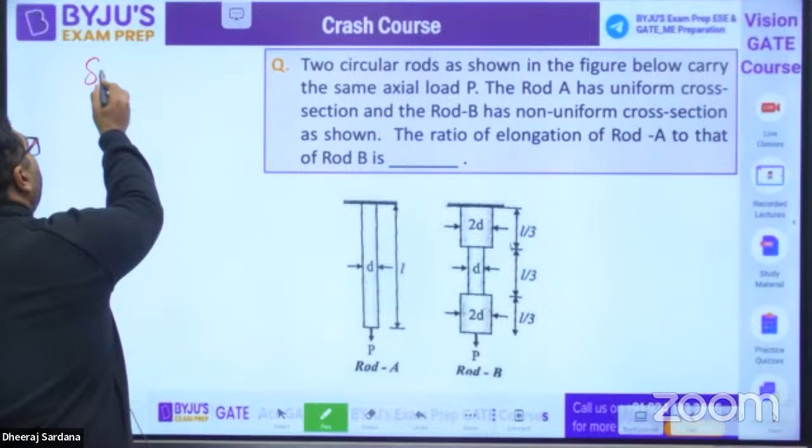So guys, here we need to find out the ratio delta A divided by delta B. That ratio you need to find out. This type of question you will get in numerical answer type, majorly, and you need to answer fill in the blanks with just that number, that ratio. So just try to solve it, I will give you the hint.

You already know that delta is PL by AE. So when writing for rod A, it is very easy. It is going to be PL upon AE, where area is pi by 4 d square. So we can say A is pi by 4 d square. And if diameter becomes 2d, then area becomes 4 times of A, so A dash is 4 times A. We can consider like that.

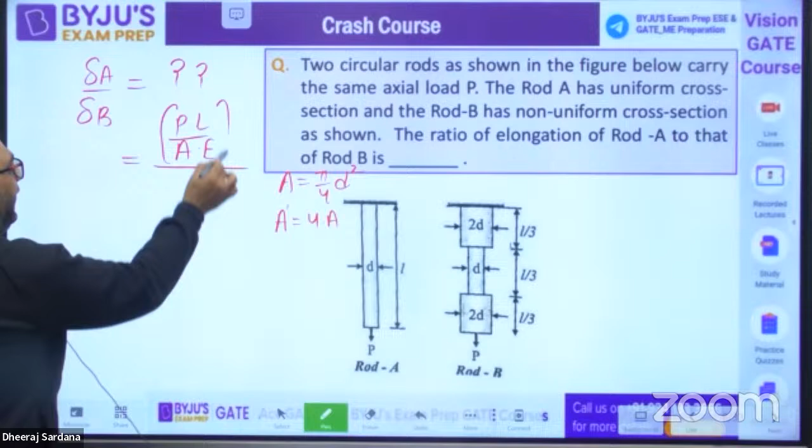Now you know that length is L by 3, L by 3, L by 3 for the second bar. So this is the first part for A. When we talk for B, these are bars in series - consider this bar number 1, bar number 2, bar number 3. As P force is acting, for any bar if you apply method of section, the force will come out equal - force will be P only.

So when we take these sections 1-1, 2-2 and 3-3, you will find in all the sections the load is P. So obviously here P1 equals P2 equals P3 equals P. And you know that in series, deltas are going to be added.

So I can say delta 1 plus delta 2 plus delta 3 for these 3 bars will be equals to P1 L1 upon A1 E1, plus P2 L2 upon A2 E2, plus P3 L3 upon A3 E3.

Now you can see the length is L by 3, L by 3, L by 3, and Young's modulus is same for everyone. So when you put these values, P by E comes out common. And L by 3 is also common, so you would be having 1 by A - this is going to be 1 by 4A plus 1 by A plus 1 by 4A. Just put this value and you will get the answer.

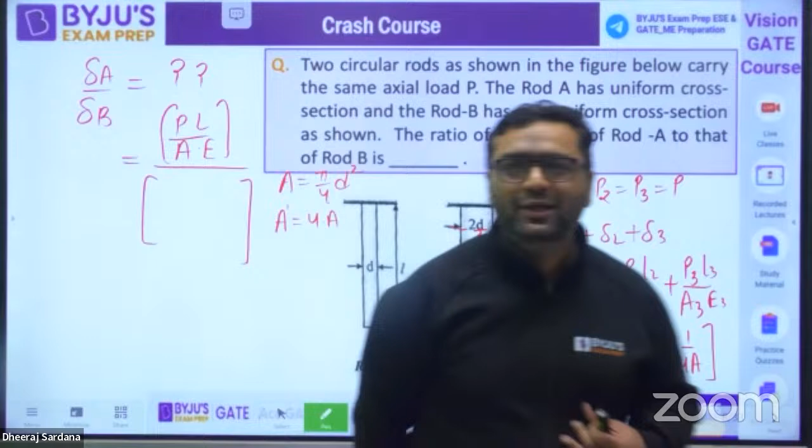Has anybody solved it? Very good, very good. So Darshan has given the answer as 2, Ludwig has given 2, Rohan has given 4 by 6, Papa Ka Ghoda has given 2. I would like to say the answer for this question is coming out to be 2, since I have already solved it. So those who are getting a different answer must have made some mistake in calculation. The answer will be 2. Is it clear? Any doubt for anyone? Because load gets cancelled out when you put this value.

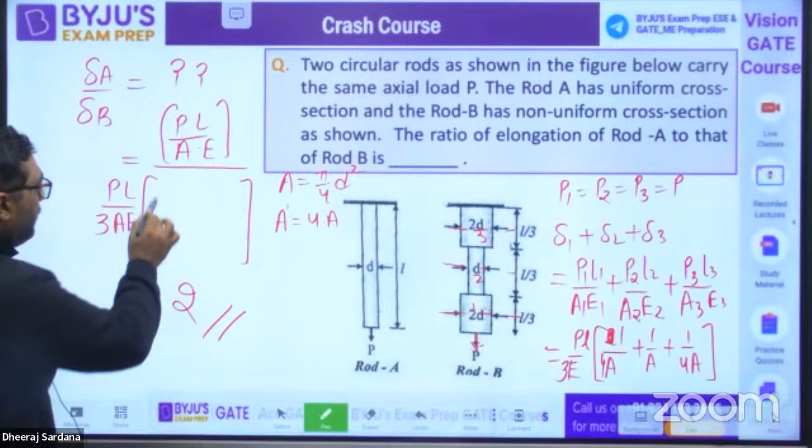You would be having PL upon 3 divided by E there. I can take A also common. Then you would be getting 1 by 4 plus 1 plus 1 by 4.

So when you have this, the rest terms will get cancelled out. The answer will come out to be 2. Is it clear for everyone? So this is how you find the answer to be 2.

Shall we move to the second question? Moving to question number 2, guys, this is from Mohr circle, your favorite area. I hope everybody gives the right answer. If anybody has any doubt, please ask me.

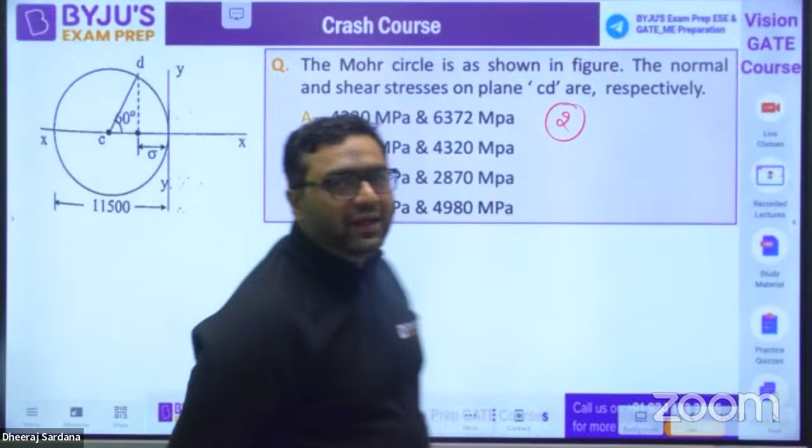So just solve this question, guys. This is for Mohr circle and we need to find out this value sigma. Yes, my dear, it is very easy to solve.

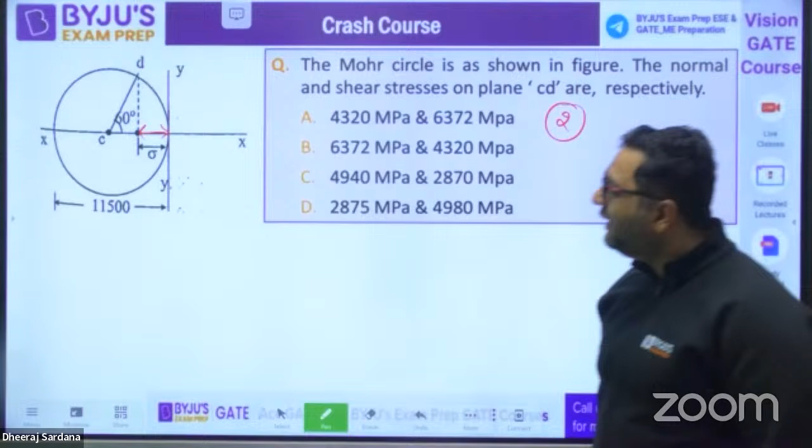Just try this. If this is radius R, can you see, if I want to find out sigma, what do I need to do? I just need to subtract this from radius. So sigma is nothing but radius minus R cos 60. That is what you need to do, and you will get the answer.

They are asking you the normal and shear stresses on plane CD. Once you get sigma, how can you find tau? This is R sin 60, so tau will be R sin 60. And to find radius, they have already given you the diameter.

Can you tell me the answer for this question, guys? Wonderful, wonderful. Arvind, what is the answer? Ludwig is saying D, 2875 and 4980. What about others? Papa Ka Ghoda is also saying D. Very good. Arvind also saying the same. Sumit Parashar also saying the same. Wonderful, guys, बहुत ही शानदार.

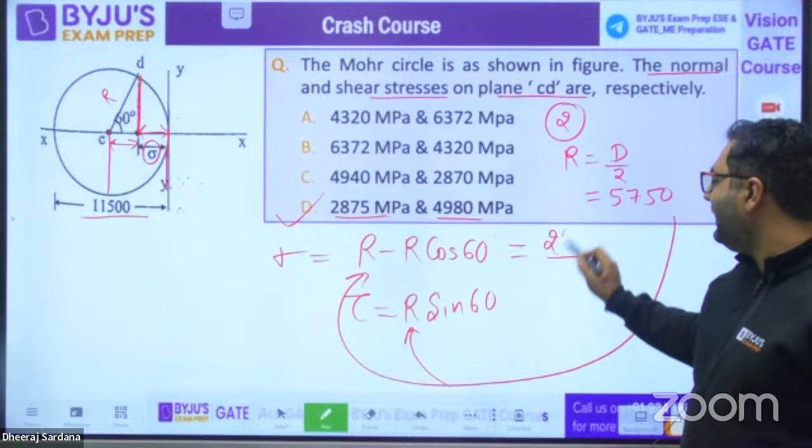And the answer is D, my dear. What is radius? Diameter by 2. So we have the diameter as 11,500, so we would be having 5750 as radius. Just put this value here and here, you would be getting the value of normal and shear stress. You will get 2875 and 4980. Very good, guys, बहुत ही बढ़िया दर्शन, संदीप, बहुत ही शानदार।

Moving to question number 3. In this question, this is from compound beam, where we have beams connected in series, and you need to find out the reaction at the middle support beam. So guys, how to do this type of question? You would be breaking this beam into two parts.

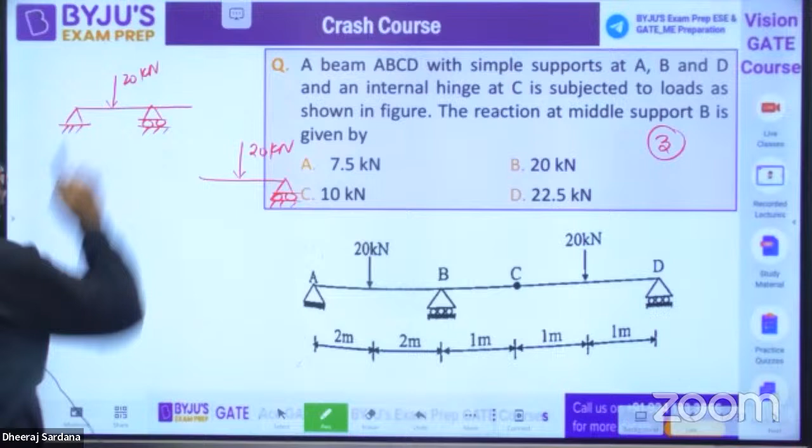The first part of the beam will be this one. This is 20 kilonewton. Here, this is also 20. This is the compound beam. I feel everybody knows how to do this type of question.

Here we have point C, which is the internal hinge, and this is D. We need to find the reaction at B. I feel everybody can do this - Darshan, Sandeep, Sumit, Ludwig.

I'm giving you a hint: in such cases, we assume a support reaction here, RD, and another here, RC, because if RC is present, only then can this beam be stable, otherwise it will rotate. That is why at point C there is no load, so if I put RC upward, I have to put RC downward as well.

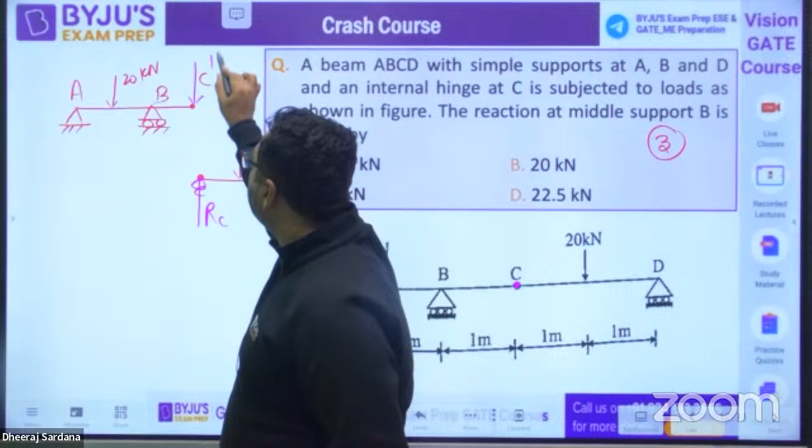Now, my dear, by symmetry, this is 1 meter, this is 1 meter, so by symmetry we can easily say RD is 10, RC is 10. If RC is 10, you can easily find RB. So this is RB, this is RA. Now you can solve it as RA plus RB equals 30 kilonewton.

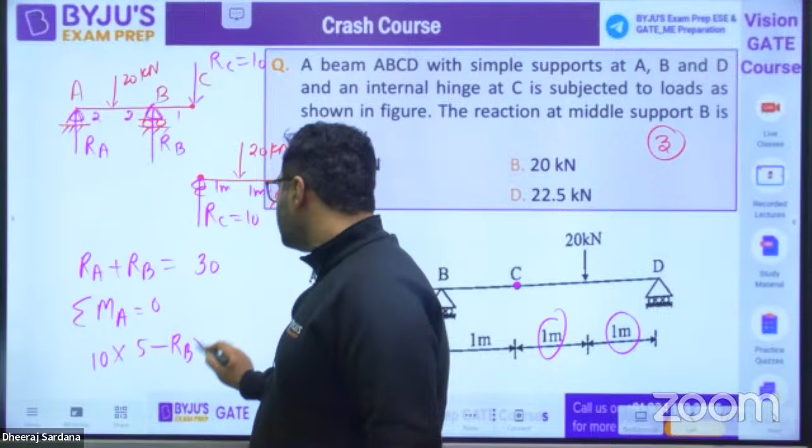Take summation of moment about A to be 0. That will give you 10 into the distances 2 plus 2 plus 1. This is 1, 2, 2. So this 10 creates a clockwise moment, then anti-clockwise minus RB into 4, then plus 20 into 2 equals 0. This will give you the value of RB. Solve it and get the answer, guys.

Solve it and get the answer. This is question number 3 for us. What is the answer? A, B, C or D? So Ludwig is saying D. Arvind is saying D. Sumit is saying B.

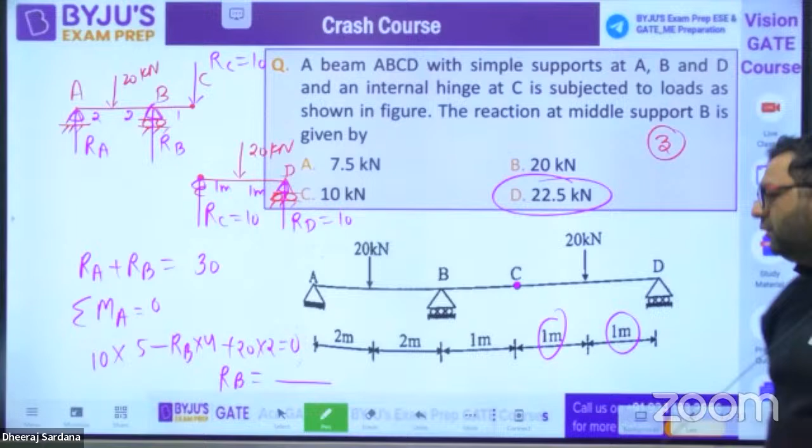This is the question from SFD BMD part, support reaction calculation. Very good, Sumit. Very good, Rohan Mandal. Very good, Sandeep. Please check it. Very good, Papa Ka Ghoda. The answer is going to be D for this, 22.5 kilonewton. So, my dear, this will be coming out to be 22.5 kilonewton.

Anybody have any doubt? You can ask me. If you find I'm going slightly on the faster note, please ask me. I have given you the hint also. Everybody is clear? Fine. Very good, Dinesh Kumar.

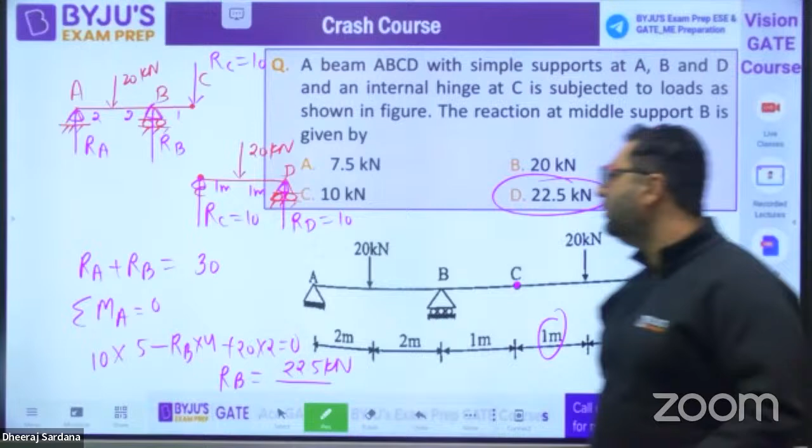So, guys, I will take 3-4 more questions, then Abhinav sir would be joining. Question number 4, we are moving on to now. This is question number 4 from bending chapter.

What this is saying? A wire of 2 mm diameter is wound round a circular shaft of 2 meter diameter. There is a circular shaft. On this circular shaft, we are going to wound a wire like this. So when we are going to wound a wire, the wire diameter is also mentioned to you. And they have said what is the normal stress in the wire. Young's modulus is given to you. Assume no tensile pull on the wire.

We will be going for bending equation here. Sigma B by Y max is equals to, because we want maximum bending stress, it will be E divided by R. Why? Because when we are aware of radius of neutral fiber, then we apply sigma B by Y is equals to E by R. Because R is known to us, R is the radius of neutral fiber. What would be the answer?

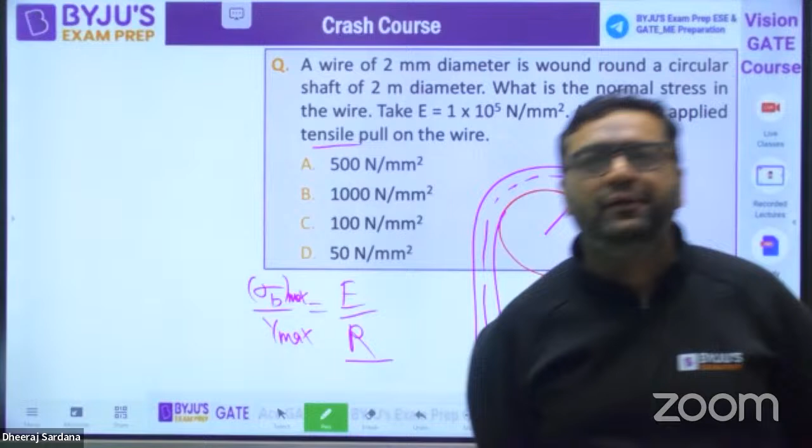This is very easy question, guys. So Madhu is saying the answer to be C. Papa Ka Ghoda is also saying the answer to be C. What about others? You can directly find out the bending stress here by doing EY upon R.

You know that Young's modulus is 1 into 10 power 5. Y is nothing but 1 mm, so into 10 power minus 3. Divided by radius. Radius is given as 2 meter. So if you want to add this 1 mm, you can also add it radius of neutral fiber. So 2 meter it is actually. 2.001 meter you can do.

So you would be getting the answer to be what? 100 MPa? Are we getting 100 Newton per mm square? 100 or 50? Please tell me 100 or 50. Everybody is getting 100. Okay, diameter was 2 na, so radius is by 2. It should be 1.00. Yes, so answer will be 100. C would be the right answer.

Very good, guys. Very nice, wonderful.

Dinesh, actually, why you are getting 50? Because you kept diameter. The formula is EY by R. This is diameter 2 meter, so radius will be 1 meter. And radius of neutral fiber will be up to this. This distance is 1 mm. So 2 meter will become 1 meter. So 1 meter plus 0.001.

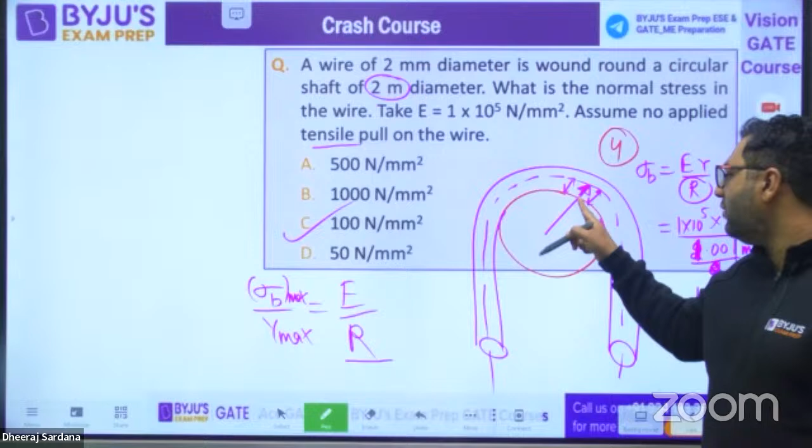Yes, moving to question number 5, guys. Moving to question number 5, guys. Very good. Moving to question number 5.

A beam of rectangular section is subjected to transverse load in a section where the shear stress at 1/4 of the beam. So they are talking about shear stresses in the beams. You know, this is the neutral axis. And they are saying 1/4 of the depth. This is D by 4. And this is the depth.

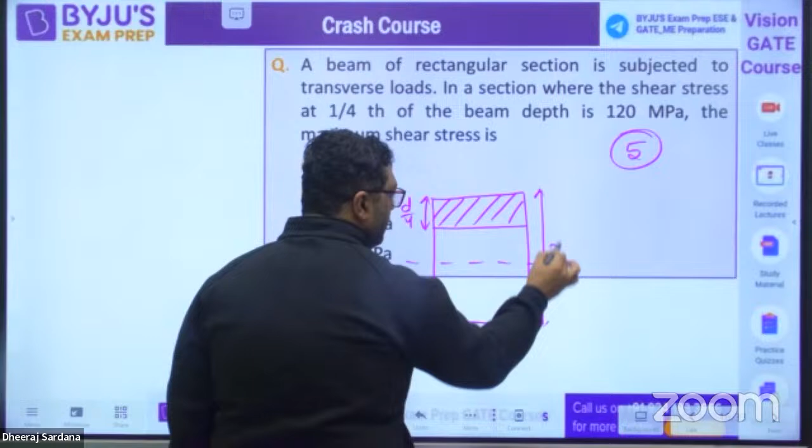You are also aware about the shear stress distribution. They are parabolic in nature, like this. They have given us the shear stress value at this position. And this value they have given as 120 MPa. This is 120. And they are asking you the maximum shear stress. So you need to find out this value.

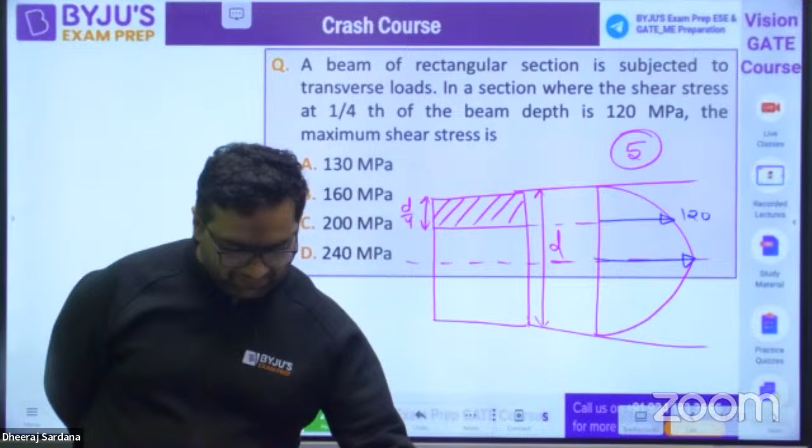Okay, this is a very good question. Arvind have given the value 240. What about others? What about others?

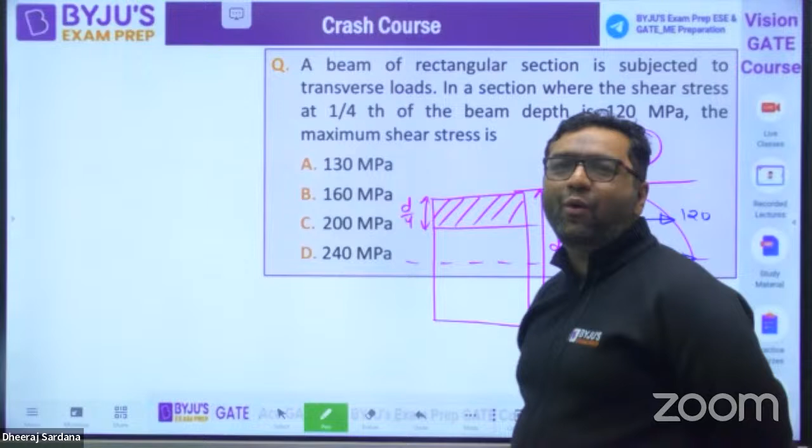Okay dear, how did you get 240? Is it a linear or parabolic relation? How did you get 240? You have just doubled it.

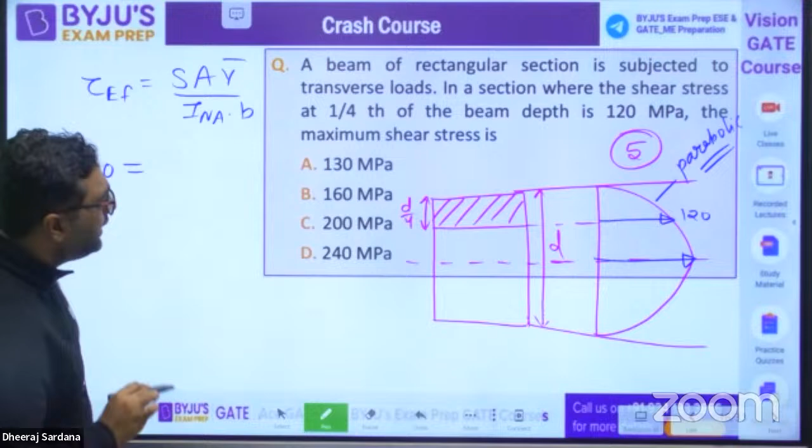Shear stress at any fiber EF is S A Y bar upon I into B. So when we say this stress is given as 120, shear force is S. The hatched area is B into D by 4.

Y bar is the distance from the neutral axis to the centroid of this area. This is D by 4, and this will be D by 8. So Y bar is D by 4 plus D by 8. And I_NA is BD cube by 12, with width B.

When you solve this, I have solved it for you. You would get 120 equals 9S by 8BD. This is what you would get from here.

The maximum value of shear stress for this case is 3 by 2 of tau average. Tau average is S by BD. So when you put this value in, S by BD will be 8 into 120 by 9, giving you 160.

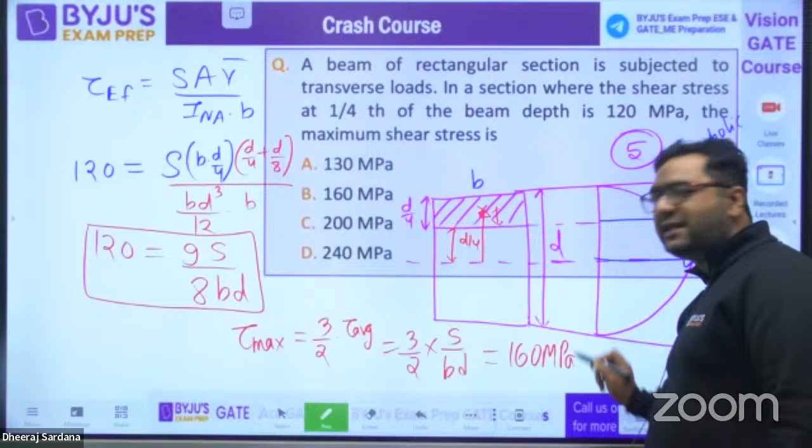So I feel now some students have given the right answer. It is not linear, you directly said 240 — this wasn't such an easy question. So Arvind has given the right answer. The answer for this is 160 MPa.

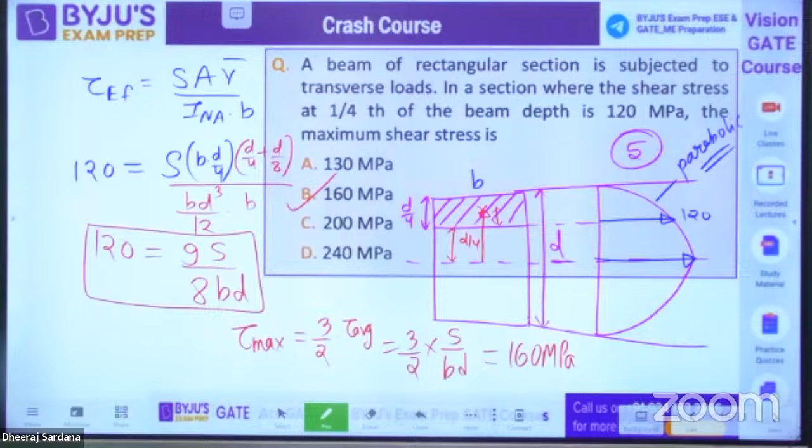Is it clear for everyone? Please tell me, did everybody get it? Very good, Dinesh. Very good, Arvind. Rohan, very good. So guys, moving to question number 6 now. I feel this is clear to everyone.

So we are covering every topic. This question is from torsion, and this is the last question from my side. Actually I have 10 questions, but the remaining 4 you will get as homework because this session got delayed and I have a class at 9:30.

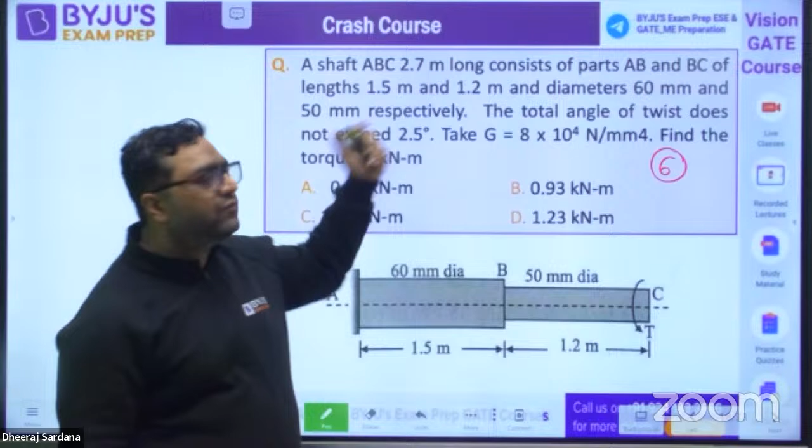So you can see a shaft ABC, consisting of two parts, AB and BC. Length is 1.5 and 1.2, diameter 60 mm and 50 mm. The total angle of twist should not exceed 2.5. They have given you G, find out the torque.

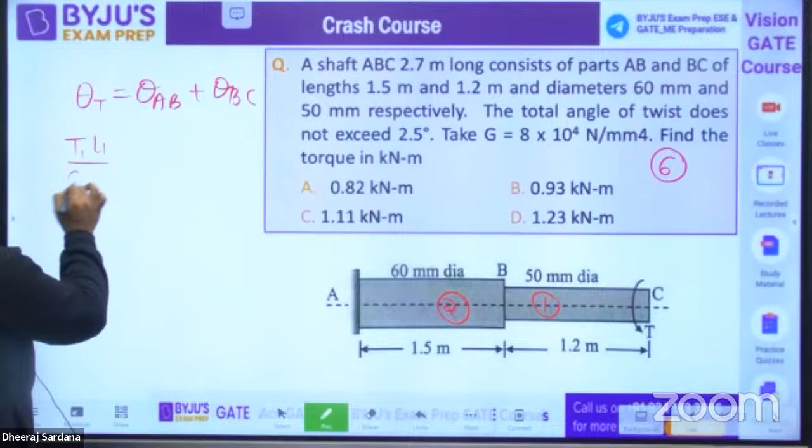You know that theta total will be theta of AB plus theta of BC. If I consider this to be shaft 1 and this to be shaft 2, you can write T1 L1 / G1 J1 and T2 L2 / G2 J2. They have already given 2.5 degrees. If you want to convert into radians, multiply by pi by 180, because whenever we write theta without sine and cos, it is always in radians.

This will give you that if you take the method of section, the torque is T only, so T1 equals T2 equals T. So except T, all other things are constant and given to you, so you will get the value of T from here.

Just solve this question. I have already solved 10 questions for you because this session was for 20 questions total, so I will be sharing the rest of the questions with solutions too, so don't worry about that. What would be the answer for this one?

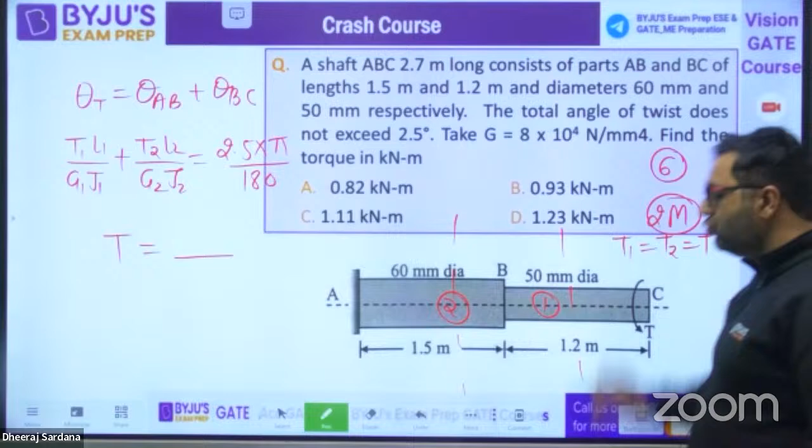Solve it. This is slightly lengthy, but these are the types of questions coming in GATE for 2 marks.

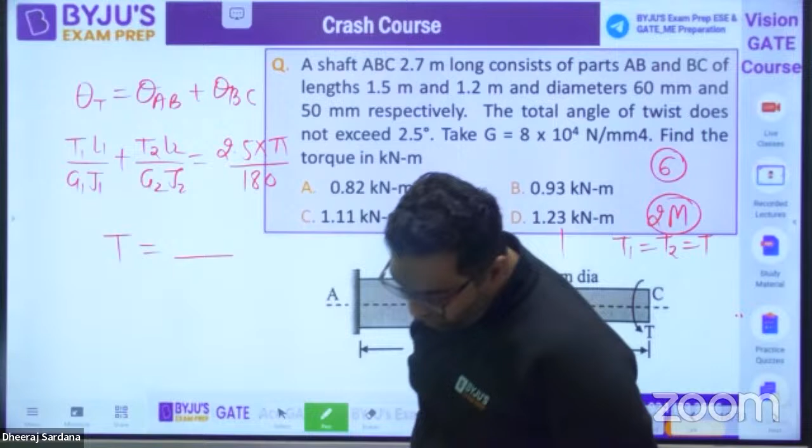Dear Sandeep, I feel you are giving answer for previous question. Okay, I Rolex is saying C, and I feel the answer for I Rolex is correct. 1.11 kilonewton meter is the correct answer. Wonderful, guys.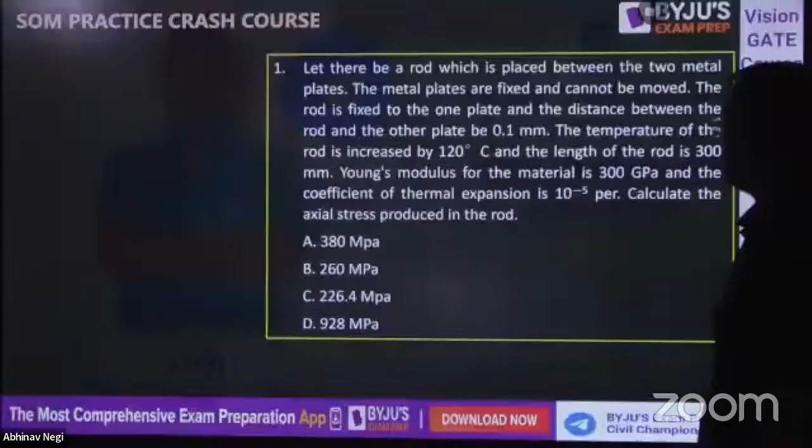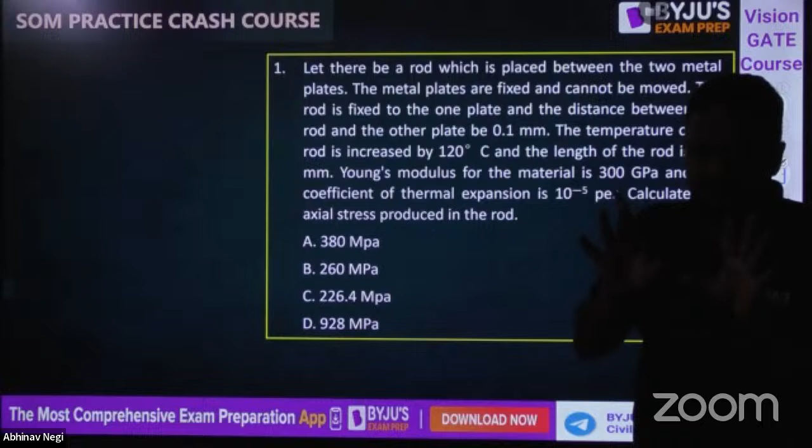Now the questions. Guys, let me tell you, you have seen in this channel the questions of ISRO, the questions of BL, or whatever. Whenever I'm taking the questions of ISRO, I always tell that those questions are of that level only, because there the questions have to be simpler - in 1 minute approximately you have to solve one question, but in GATE 3 minutes are there. So questions will be of GATE level here, particularly 2 marks.

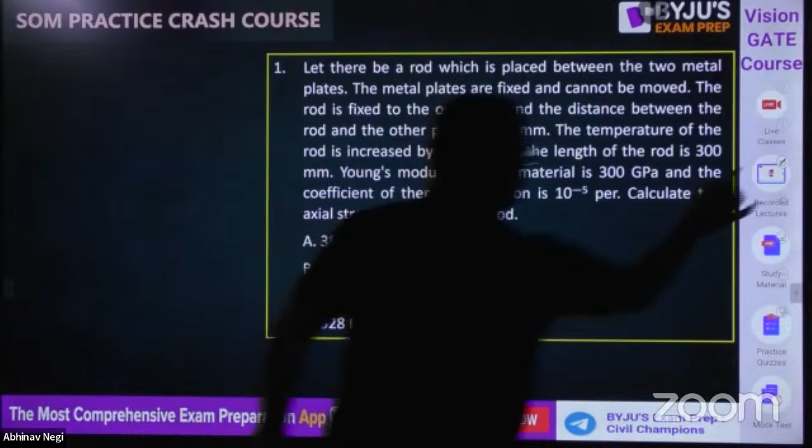Okay guys, hit this question hard. Come on. Let there be a rod placed between 2 metal plates. This is a metal plate, and this is a metal plate - they cannot be moved, meaning it is fixed. If the plates cannot be moved, it is fixed. The rod is fixed to one plate, and the distance between the rod and the other plate is 0.1 mm. Now the rod is placed here - it is fixed here, but here the gap is 0.1 mm.

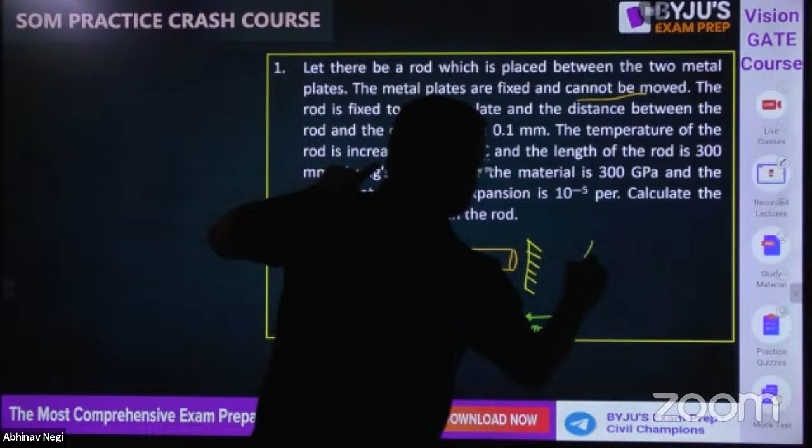The temperature of the rod is increased by 120 degrees Celsius, so Delta T is increased by 120 degrees Celsius. The Young's modulus is given and the alpha is also given. Calculate the stress - first of all, guys, will the stress come? We are not sure. Let me find out the free expansion. If it is not fixed, what will be the free expansion? Free expansion will be L alpha delta T.

Okay, length is given - where is the length? The metal plate cannot be moved, the rod is fixed to one plate, and the distance to the other plate, the temperature is increased by this. The length of the rod is 300 mm. Length is given, alpha is given, delta T is given. By putting all these values, I've already done this for you - the value you are getting as L alpha delta T is 0.36 mm. So if it is free, the expansion will be 0.36 mm.

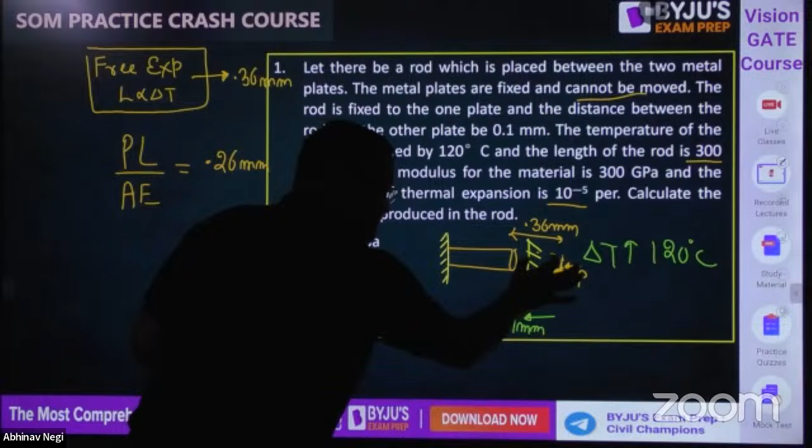0.36 mm, but here the expansion can be only 0.1. So some force P is coming and putting pressure from this position. This P into L by AE is putting it here. How much distance is it putting? From here to here, that is 0.36 minus 0.1, equals 0.26 mm. So this P is coming and it is compressing, not allowing this much delta. This much delta it is not allowing. 0.1 can happen out of 0.36, but 0.26 cannot happen. So this P is coming in such a magnitude.

This P is coming in such a magnitude that 0.26 is resisted. Out of 0.36, 0.1 can happen. Now what they are asking is to calculate stress. P by A, sigma L by E is equal to 0.26. This is known, L is known, Young's modulus is known. From here, the sigma value you get, please check, is 260 megapascal. That is option number B.

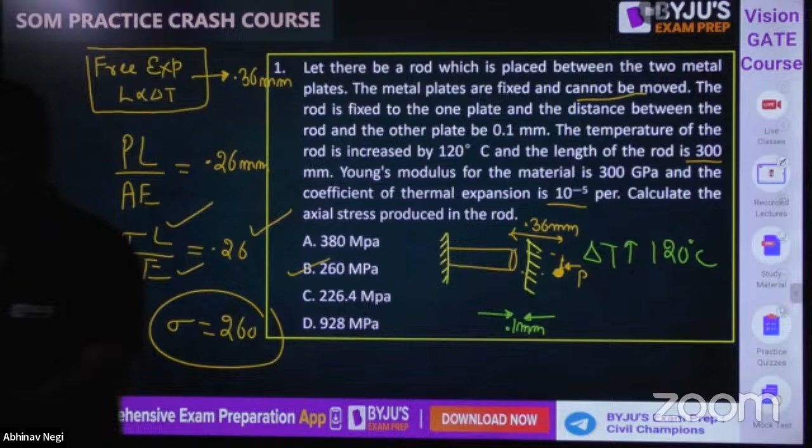Guys, gate level questions we will be solving here. Have you got it? Any doubt, my friends? Any doubt, I'm again telling you, you can ask me. Let's move to the next question.

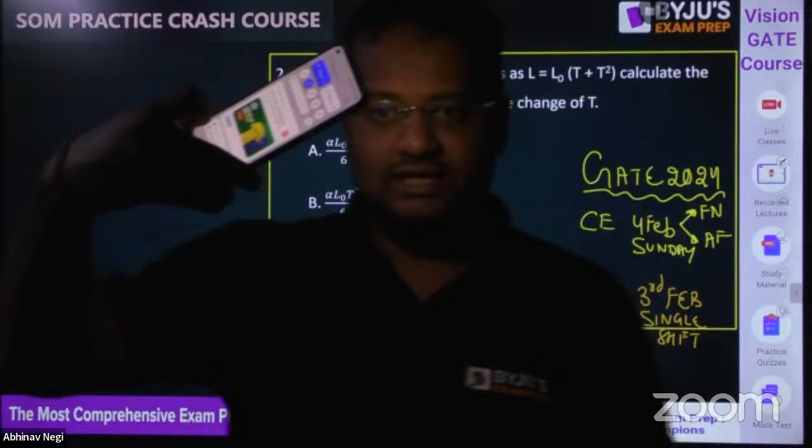Now let us do this question. This is a gate level question, guys. This is a gate level question. Here we are not doing any ISRO level question or anything, these are gate level questions. Okay, chalo, chalo, chalo, hit it, hit it, hit it.

A metal rod of length L, but length is not fixed, it is varying with temperature. At different temperatures, length is different: L equals L naught times T plus T square. Length is not fixed. Calculate the deflection due to temperature change of T. So what is delta? It is L alpha delta T, correct? So for a very small instant, d delta, because length is changing at every temperature, is L naught T plus T square, this is L, into alpha into dT.

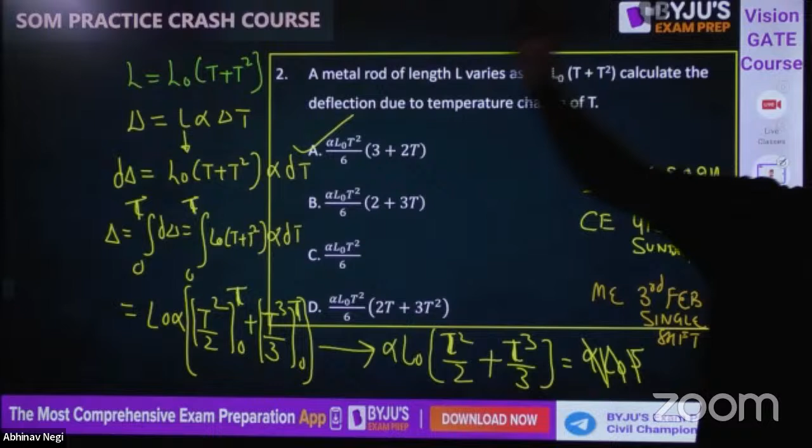So option number A. Have you understood this, guys? Give me yes or no, everybody. Have you understood or not? Beautiful gate level questions will be there. Papa Goda, Sumit, enjoying? Some more interesting questions.

A couple of questions you will see today will be totally new, ones you haven't seen in any book. Now this one, I guess you can do this. The correct BMD will be... I guess this is the easiest question of my whole SOM PPT. Guys, this is a hinge, so the bending moment at C will be 0. Bending moment at C is equal to 0, since C is a hinge.

Now what will be RB? Bending moment at C is equal to 0, taking C from the right hand side. RB into L is clockwise and P into L by 2 is anti-clockwise, equal to 0. So RB value from here, L cancels L, equals P by 2.

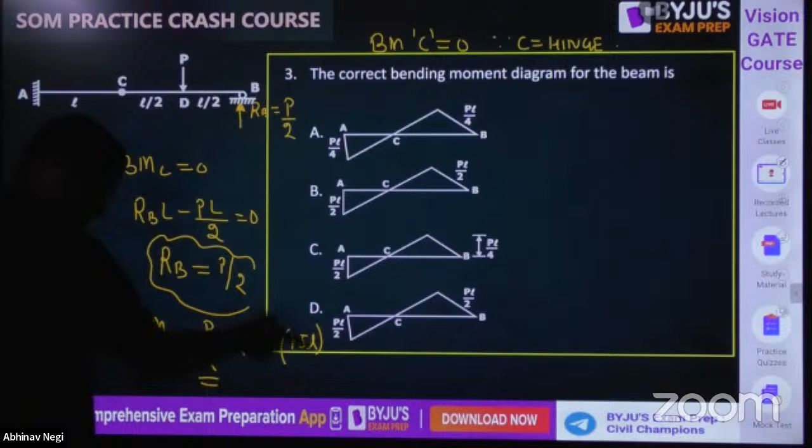What is the bending moment at A? Taking C from right hand side, upward load positive: bending moment at A equals P by 2 into 2L, then P downward so minus, into L plus L by 2, that is 1.5L. So it is PL minus PL, 1 minus 1.5, which is minus 0.5PL.

So it is minus 0.5PL at A, PL by 2. So A cannot be the answer. B, C, D can be there. Only at A you have PL by 4.

Bending moment at C is equal to 0. Bending moment at B has to be 0. What is bending moment at D? From right hand side, P by 2 into L by 2, that is PL by 4. It is not PL by 2, it is PL by 4. So option C is correct.

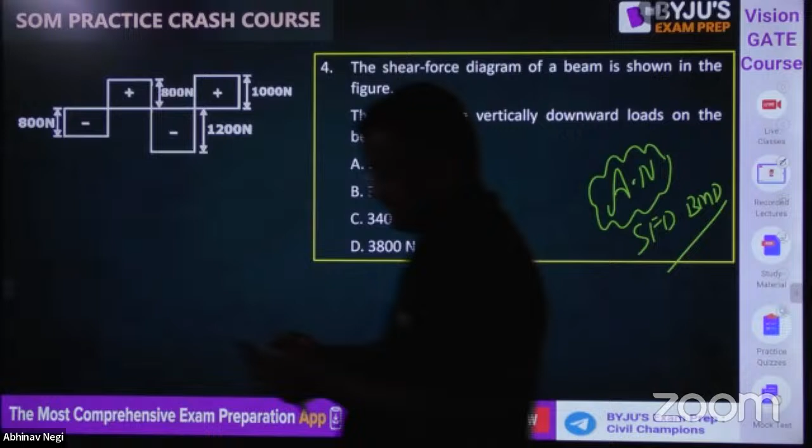First of all you have to solve this, guys. In the AN method, you go from left to right, and whenever there is a shear force fall, it is a downward point load. So here it is falling 800, a downward load of 800. Here is an upward load because it is jumping. Here downward load because it is falling, 800 and 1200 is 2000. Again when you go here, upward load because it is jumping. Here again downward load, therefore it falls 1000.

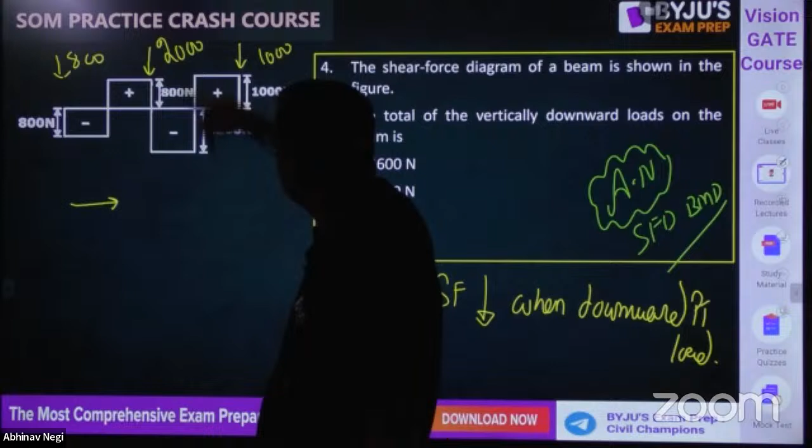Okay, 3800. Have you understood?

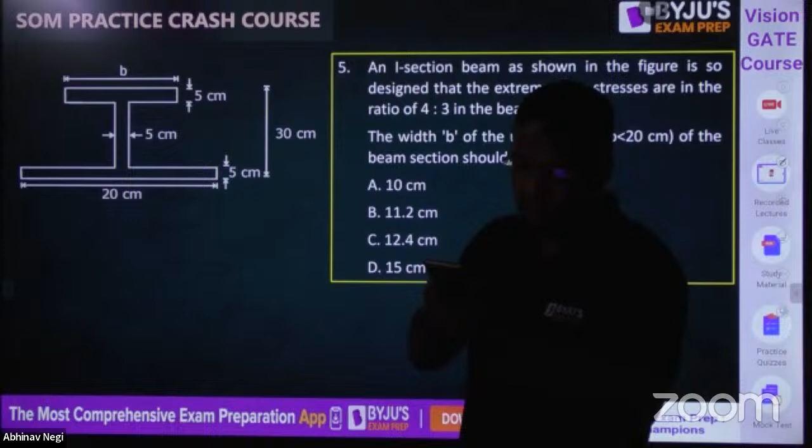Where it will be 4, above or below, in the ratio 4:3? Where will it be 4? The width B, guys, the neutral axis is the centroidal axis. Here it is a bigger thing, B is less than, it is smaller.

So neutral axis is always at the centroid. Centroid will be near the bottom, right? So it will be 4 at one and 3 at the other, 4 alpha or 3 alpha, I can write 4 into 3. Have you understood? Not understood?

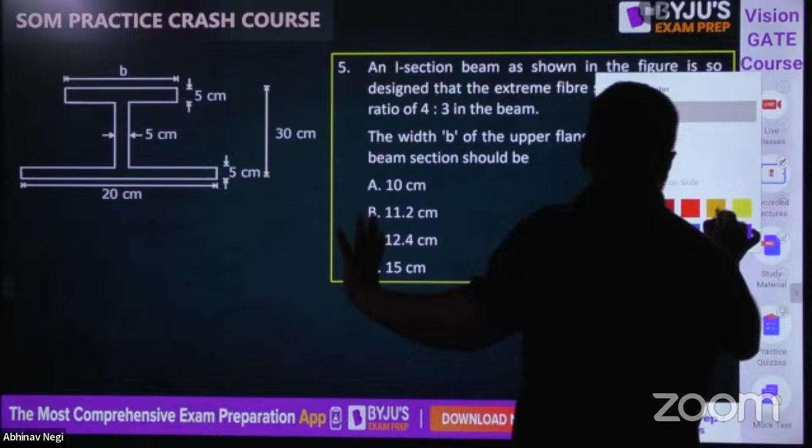I am saying again, guys, please see that the neutral axis passes through the centroid. There is a larger area at the bottom, so the centroid will be at the bottom. And once the centroid is at the bottom, this stress will be smaller and this will be bigger. It is 4, it will be 3, that is 4 alpha and 3 alpha. Have you understood? Okay, now let this distance be x.

So this will be 30 minus x. From similar triangle concept, x upon 30 minus x is equal to 4 by 3.

From here, I have already calculated the value of x. X is equal to 17.143. So this value of neutral axis will be 17.143 and the bottom value is 12.857.

Now, guys, from similar triangle concept, I can find the stress here also. What is the stress here? Sigma. And I can find out the stress here also, let this be sigma dash. Sigma by 4 from similar triangle concept will be this distance, so this is totally 17.143 minus 5.

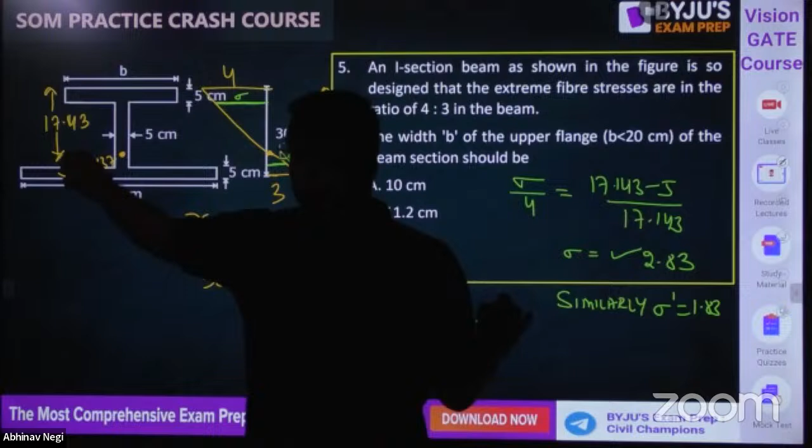12.857 minus 5, and this 3 is at 12.857. So from here, find sigma dash. We have to find B. Okay, till here, any doubt, guys? Please let me know, Madhu, Dinesh, everyone. Any doubt till now? Now what we have to do?

We have to do now compression is equal to tension. So what is the compression here? This B into 5, this is the area. And in this area, the stress here is 4, here is sigma. So average stress is 4 plus sigma by 2.

Plus, now this area of compression. Here the stress is sigma here, and here it is 0. So sigma plus 0 by 2 into stress into area. What is area? 5 into this distance, so 5 into this 5, and what is this distance? 17.143 minus 5, this is compression.

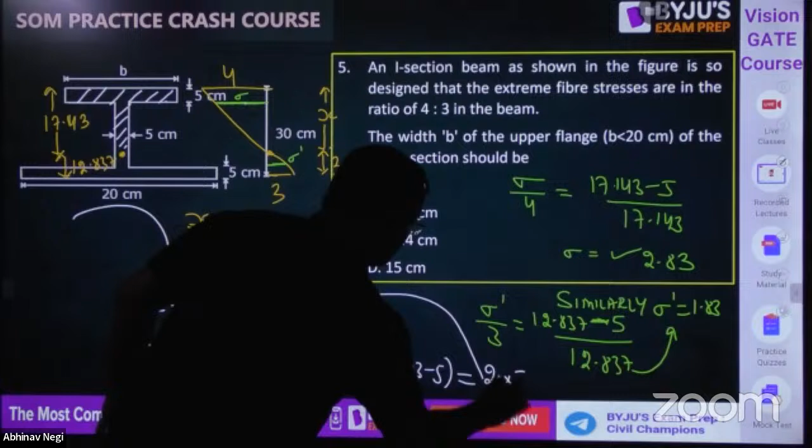And what is tension? This 20 into 5 area. 20 into 5, and here the stress will be, here it is sigma dash, and here it is 3. Sigma dash and 3, so it is sigma dash plus 3 by 2, plus this small area.

This small area is 5 into what is this area? 12.837 minus 5. This area, what is the stress? Here it is 0, and here sigma dash. 0 plus sigma dash by 2. From here, the value of B, you will be getting as 11 point something.

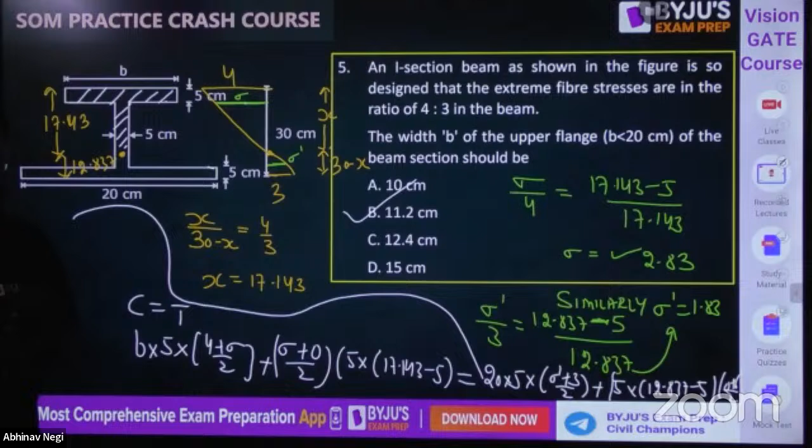Guys, a new question. Let me tell you, this is a new question for all of you. New question in the market. Okay, I am quite sure you have not seen this. You have seen the questions when I have also done those questions that wire is put over a drum.

What is the stress? This wire is put over the drum, so what is the stress? So radius of wire is equal to radius of drum. That thing you have done, na? So this is a new type of question, not that one. Okay, that also many times we have done.

See what is here. A thin ruler like this, having length 30 centimeter. Okay, and the cross-sectional area will be, this is 0.05 centimeter and this is 2.5 centimeter. So this is bent like this, and this is bent like this such that this angle is 30 degrees, 60 degrees.

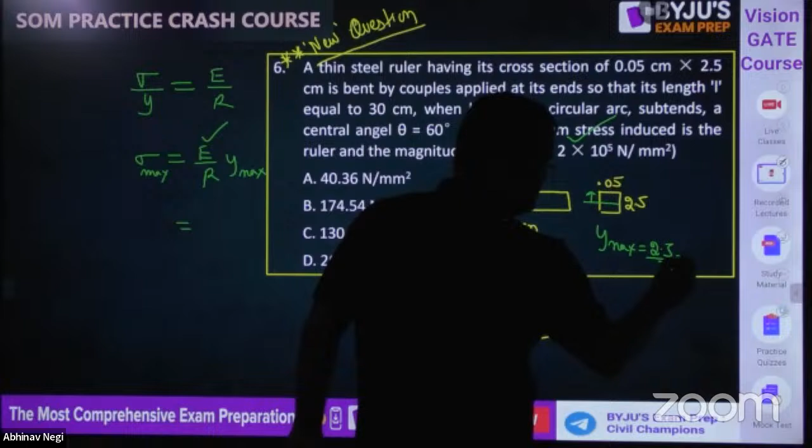The maximum stress will be sigma by y is equal to M by I. M is not given, E by r, so sigma is equal to E by r into y. Sigma max is equal to E by r into y max. E is given, and y max is this, 2.5 by 2, or if in millimeter, this is in centimeter, in millimeters is 25 by 2, so 12.5 mm. So E is known, y max is known, R is remaining.

Now what is the value of R? Let me tell you. This is theta, so theta is equal to length by R. So from here, R is equal to L theta. But theta here is in radian. So L is, if I want millimeter, 300 mm, and theta in radian 60 degree, so in radian it is pi by 180. Put that R here and get the answer.

Give me yes or no, guys. Come on. Have you understood?

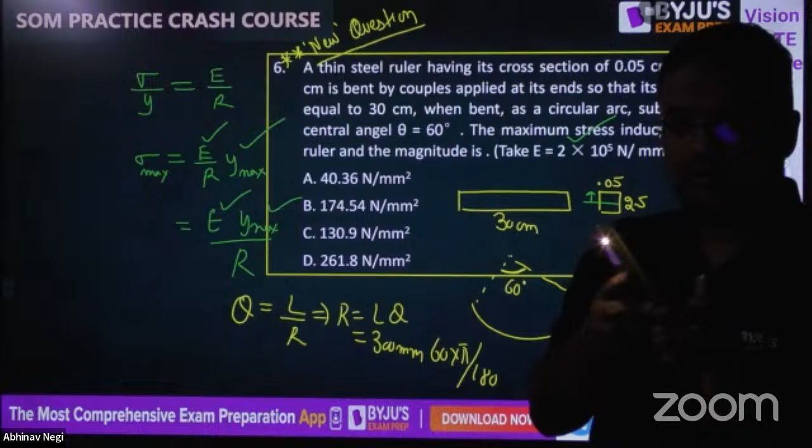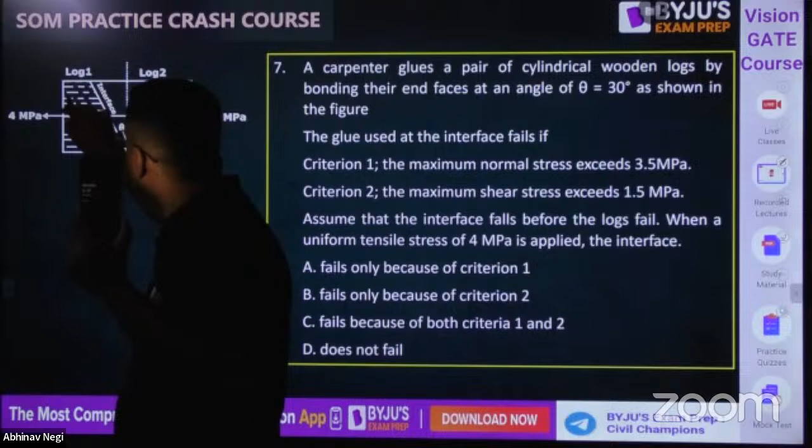Now this one, beauty question. A carpenter glues a pair of cylindrical wood logs. This is log 1, this is log 2. They are joined, and the glue is put. There are two different things, and the glue is put. This glue is green, glue is put here.

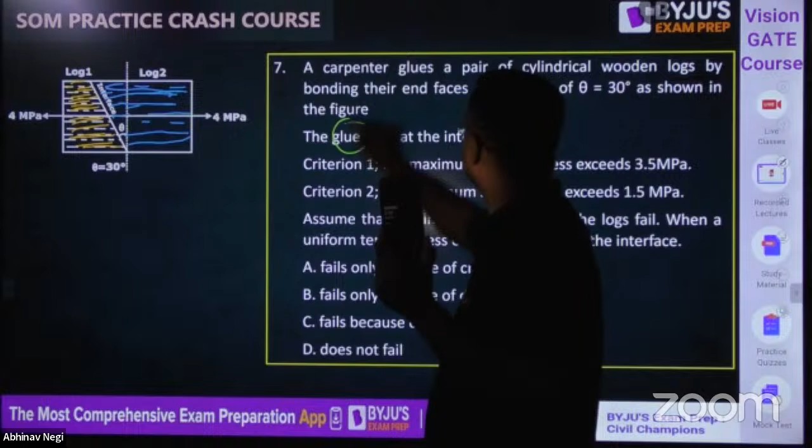Now, failure will be, of course, the maximum chance of failure will be from glue only. Maximum chance of failure will be from glue only, correct?

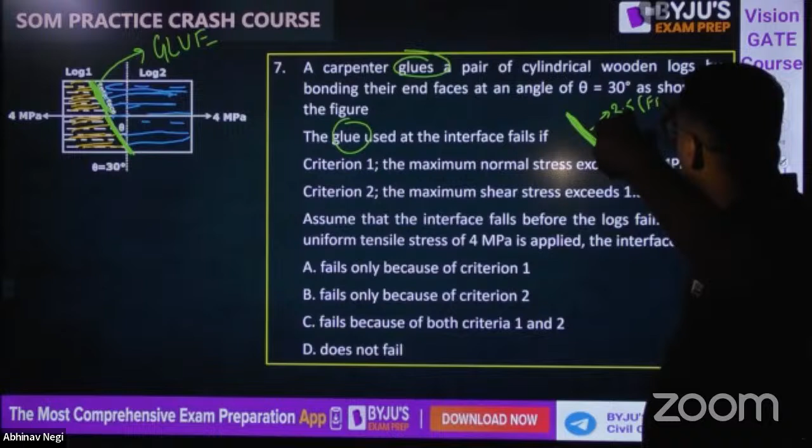Now, glue will fail if the maximum normal stress exceeds 3.5 - in that glue, if the stress is 3.5, it fails - or if the shear stress is 1.5 in either direction, it fails. So in any case it is failing. Please check, this specimen will resist - ye jinda bachega, it will survive or not - please check.

Everyone, this will survive or not.

Okay, now guys, we can think of it like this. Sigma x is equal to 4 and sigma y is not given, and tau is also not given. So we can find out sigma x dash at 30-degree angle from the formula: sigma x plus sigma y by 2 plus sigma x minus sigma y by 2 cos 2 theta plus tau xy sin 2 theta.

That value you can find out, and you can similarly find sigma x dash also - that value is coming 3. Similarly, find tau x dash y dash at 30-degree from the formula sigma x minus sigma y by 2 sin 2 theta and tau xy cos 2 theta - it is coming something 1.7.

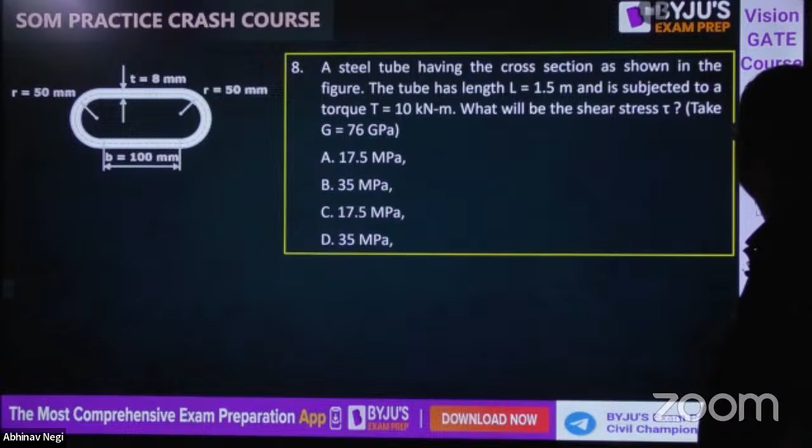Okay, this one, nice question. Again a nice question. What you have to find out: what will be the shear stress tau in this thin assembly. Now I want to see who can do this question. This is a thin - I hope you remember the area mean concept. Area mean concept, you remember that?

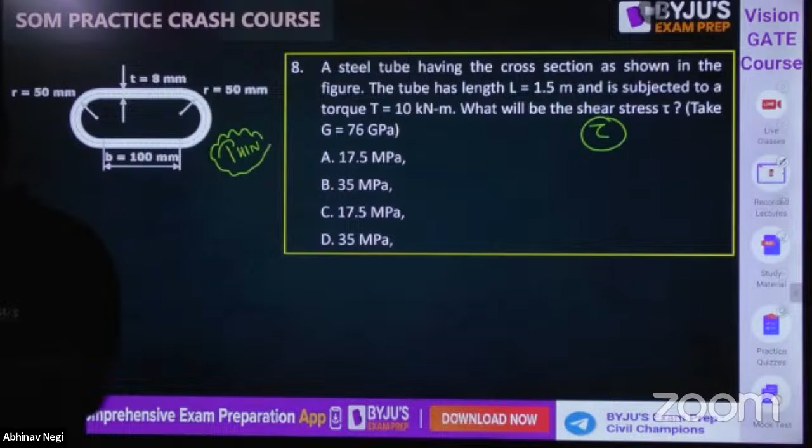Let me tell you the concept: shear stress is equal to T by 2Am, and it is constant throughout the section.

At the circumference or anywhere, it is constant, but only for thin sections. Only for thin sections.

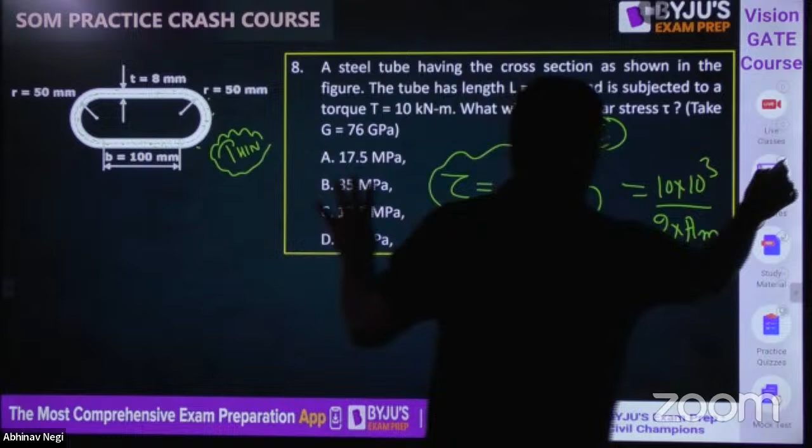What is T? T equals 10 into 10 to the power 3, divided by 2 into Am. Am is the mean area, shown here. What is this area? Tell me first.

Am is the mean area. So these will be two half circles, which together give pi r square. Pi into 50 square, correct? And this is a rectangle, so 2 into B.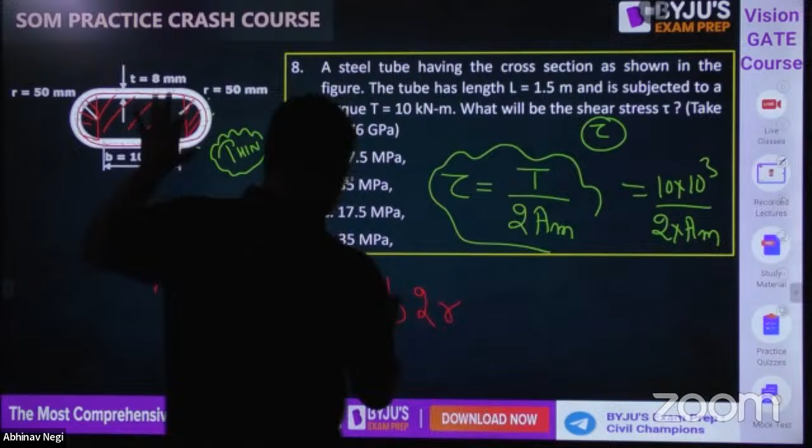This B is into this diameter. This is half circle, complete circle, pi r square. This is B and this is 2r, R and R.

So this Am is coming to be 17850, please check. If you put 17850, the value comes to 35 megapascal. That is option B. Give me yes or no.

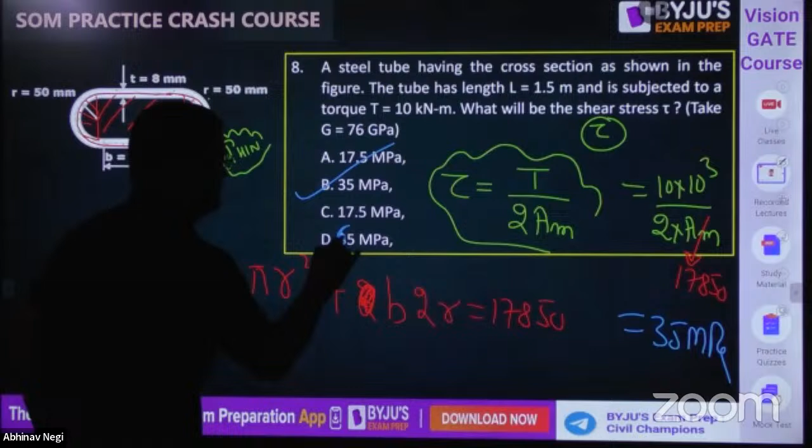Sorry, let it be 65. Give me yes or no, everyone. Understood? Okay.

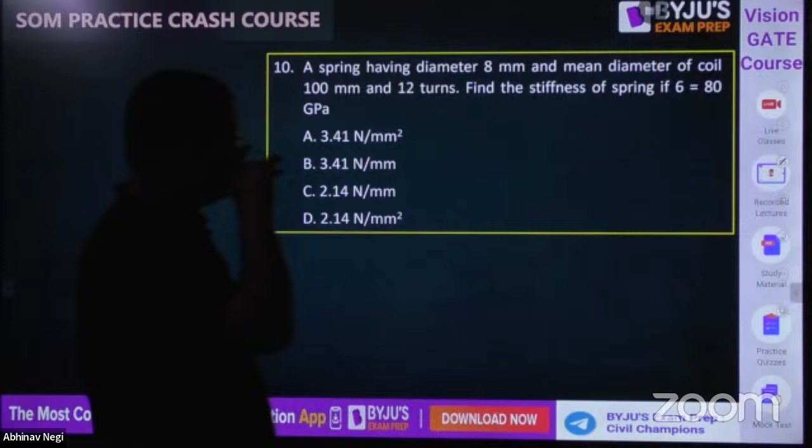Now going here: a closed coil helical spring. This is homework, please put the answer in the comment section. This is the last question: find the stiffness. Guys, U is equal to 32P square into r cube into n into GD4.

What is this? This is a closed coil spring. N is the number of turns. R is this thing from here to here. D is the thickness of this wire. P is this, R is this, N is number of turns, G is the shear modulus, and D is this.

Everything I explained. Now from Castigliano's theorem, this is strain energy U. Castigliano's theorem says deflection is del U by del P. So differentiating it with respect to P, we get 64P R cube into N into GD4.

So what is stiffness? P by delta. So P by delta is GD4 divided by 64 R cube into N. So what is the value coming? Every value is given, so you will be getting it as 3.41.

Stiffness will be in Newton per mm. Stiffness unit will be Newton per mm. Have you got it? Okay.